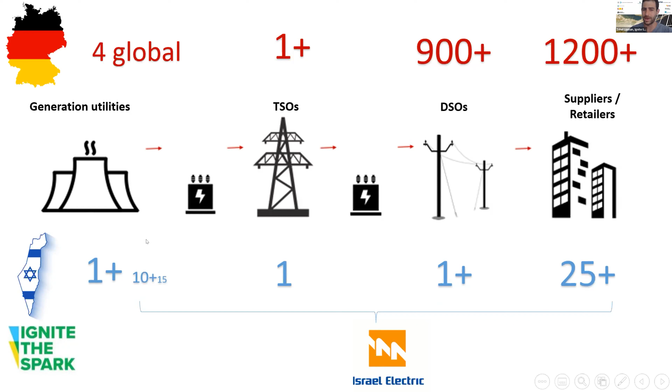Now try to compare that to Israel. Yes, both by size and population we are smaller than Germany, but we have a huge vertical utility called Israel Electric Company, which is both the biggest energy manufacturer, the only TSO, the only DSO, and the biggest supplier. Now, luckily, there was a big reform happening in Israel that unbundled the local energy market, but still, I think the structure of a very vertical governmental-owned company that owns most of the electricity market here in Israel has caused us some isolation.

Not isolation from COVID as we know it, but isolation related to the fact that we are not trading energy with any other neighboring country, except for a tiny line of 20 megawatts between Jericho and Jordan.

We found a lot of natural gas over the last decade, which allowed us to portray natural gas as a greener energy and put most of the focus there. Yes, I know most of Europe is jealous of Israel for the relatively comfortable energy prices we have, thanks to the fact that we have some domestic gas, but still, it allowed us to move most of our investments away from new energy-related technologies.

I think also the fact that there is no apparent win story or huge success story of a renewable energy tech company - and we can talk about the SolarEdge story afterwards - all of that has caused Israel to be, in a way, a few steps behind the rest of the world when it comes to energy technologies.

Now, after saying some maybe not the most appealing description of what's happening here in Israel, I'm happy to open this webinar and tell you that everything is changing now. And mostly the speakers that come after me will prove that.

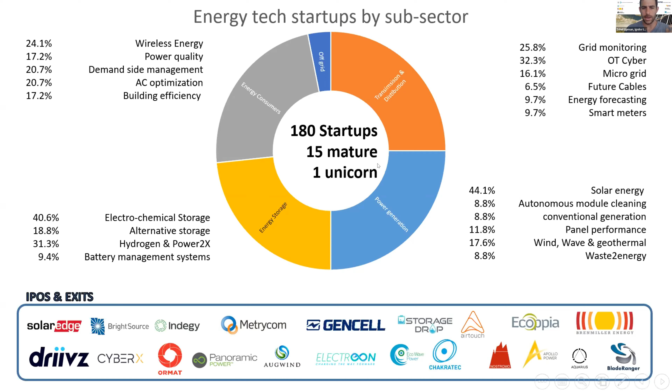Some opportunities for non-dilutive funding, including, and that will be most relevant for this call, some consortiums from the New Horizon programs and the EIC program, which I think is very relevant for everyone on this call, and several other stakeholders.

There are different cool technologies that are not on the map and right now in stealth mode, such as green hydrogen produced with quantum dots, a technique that basically skips electrolyzers, room temperature superconductors, a fusion company developing fusion in a box—a fusion system inside a container—drones that support the efficiency of wind turbines and solar plants, and many more.

A word about Ignite the Spark. We are trying to foster and help companies grow, but also create the new generation of energy entrepreneurs here in Israel. We'd be more than happy to find partners or similar ecosystems in Germany. So feel free to reach out if you can create smart connections and straightforward, non-monitored networking with other stakeholders. Exactly, this is our main goal.

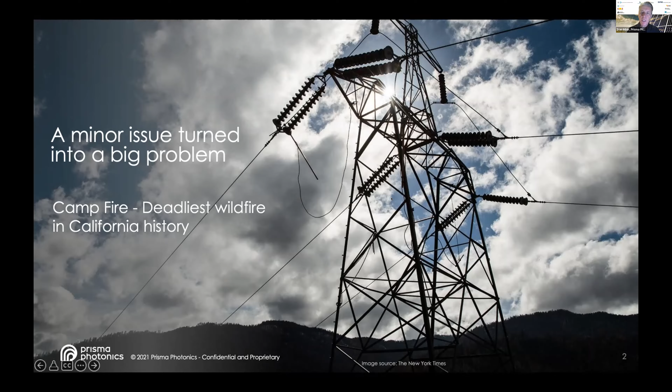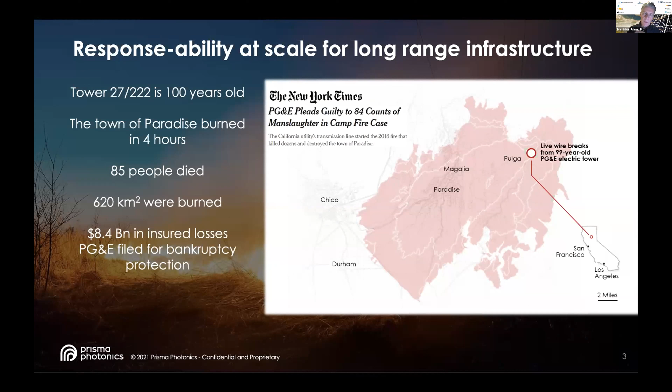If I take you back to November 2018, there was a single failure on this tower in the transmission line of California. This single failure initiated a wildfire, and eventually this single failure evolved to be the deadliest wildfire in California ever, with tens of people who died, tens of billions of dollars in damages, and eventually bankruptcy of the Californian utility. Everything started with a single failure in a critical infrastructure.

This is exactly what we are coming to help and solve. We're giving a solution that enables detecting in real time, with precise localization, any failure along a transmission line, and also detecting side effects like wildfire. But it can do much more than the two of those.

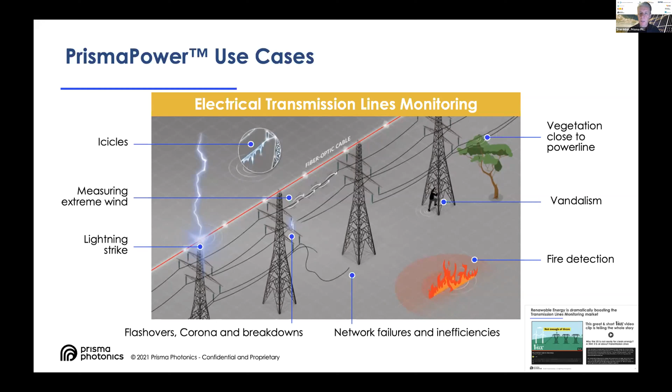It can give indication about, for example, extreme wind, lightning strike, icing, aspects of vandalism, of course failure, but also predictive maintenance - so before the problems evolve into a failure, we can give indication about the problem and its precise localization. This solution is relevant to almost any kind of long critical infrastructure, but in this talk we're focusing on electricity and the transmission line.

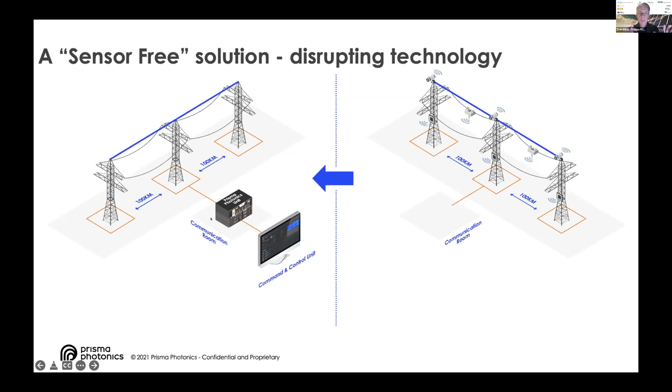What we're doing is basically using as a sensor the pre-existing optical fiber, a fiber optic cable that is already part of the transmission line, so there is no need to install any sensor at all. While we are plugging our system into this optical network, a single system can turn 100 kilometers of fiber into a high precision sensor. It's a very simple installation that's practically designed to scale big.

There is a lot of benefit. There is very fast deployment - plugging in a system and then immediately 100 kilometers turn into smart infrastructure. And since we don't need to install anything, the cost per kilometer is very attractive. And of course, we can detect a lot of aspects - it can be safety, security, maintenance, and even predictive maintenance.

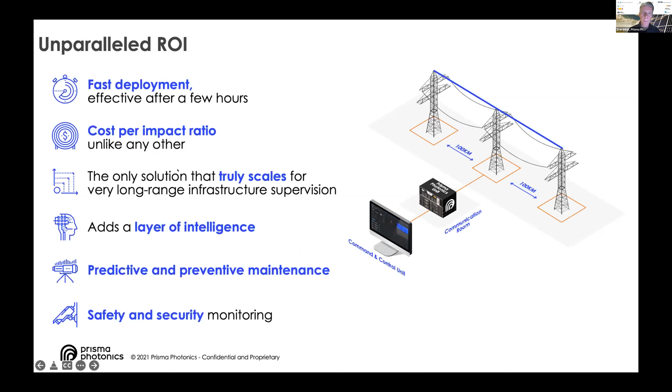I would mention that when we're speaking about thousands of kilometers and more, we're speaking about multiple systems connected into this fiber optics, but everything eventually is presented in a single, consolidated user interface. So the utility can see the whole picture of the whole network, whether it's 100 kilometers or 10,000 kilometers.

It's important to say that I mentioned overhead transmission lines, but this technology is also highly relevant to underground high voltage cable, and it can give failure localization. This is very important when you start to dig, mainly in urban environments, where digging is very complicated and expensive. So we can give a very precise localization within a resolution of a few meters.

We can do aspects of predictive maintenance, so before a problem evolves you can deal with it. And also third-party activities — if someone else is risking the electricity infrastructure by digging or walking close by, we can give an alert with precise localization and prevent a potential problem.

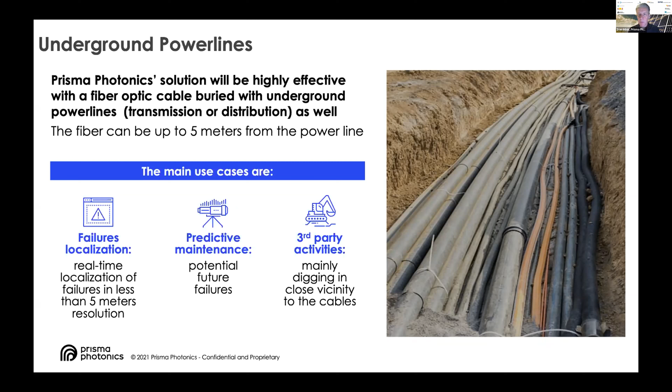Another interesting aspect is that two months ago we announced that we closed a 20 million investment round, and one of the investors, or participants, in this round was E.ON, the German power utility, probably the biggest utility in Europe. For us, having them participate in our finance round is a very significant vote of confidence from such a strategic player in this industry.

We're working on, or deploying, this technology globally, starting in Israel with a cooperation, and even recently participated in our investment round with the Israeli Electric Corporation. But also in North America with partners like the New York Power Authority, and also in Asia Pacific with partners like Tata.

The company started in 2017. We are 40 employees, and we're growing fast — we aim to double this headcount by the end of the year. I think that the main asset of the company is the team. We have a very strong technical team, real deep tech, from laser physics to machine learning and algorithms, but also strong management with vast experience taking startups from incorporation into global leadership.

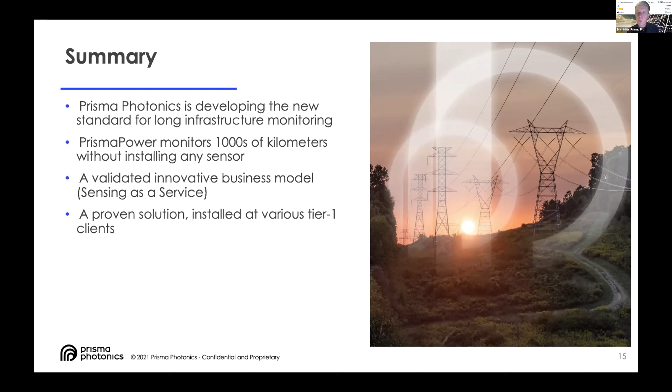Thank you very much, and we will be glad to answer questions either in this session or to follow up with anyone who's interested later on. Thank you.

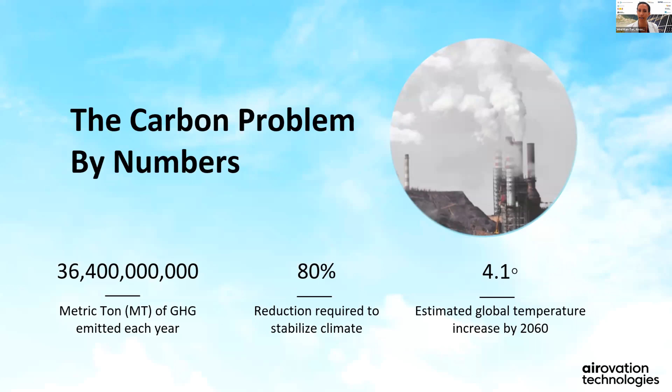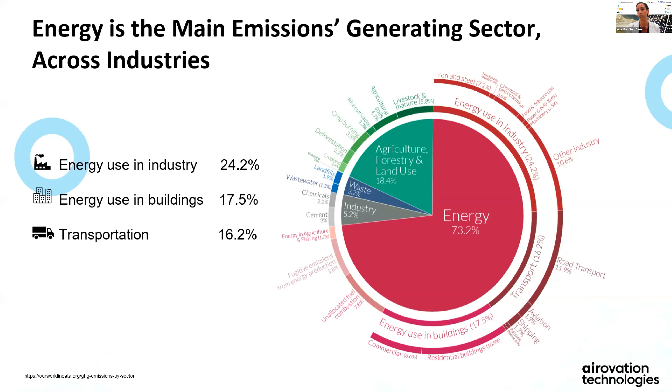And the way we do it is by capturing carbon and mineralizing it. The bigger problem, if we look at numbers, is that every year over 36.4 billion metric tons of greenhouse gases are emitted into the atmosphere. Out of that, 65% is carbon dioxide. Now, if we drill down into the most polluting sectors, we see that the energy sector has the greatest emissions, specifically energy used in industry.

So after 10 years of research by the Hebrew University in Jerusalem, a group of chemists led by Professor Yoel Sasson managed to stabilize the superoxide radical, which is the strongest oxidizer known to man in nature, inside a liquid phase.

So what it actually does is convert the carbon dioxide that is being captured into minerals, and those minerals are used as raw materials in many industries. This is how we create the circular economy, by providing those raw materials to the food and feed industry, pharmaceutical, fertilizers, and also glass industries.

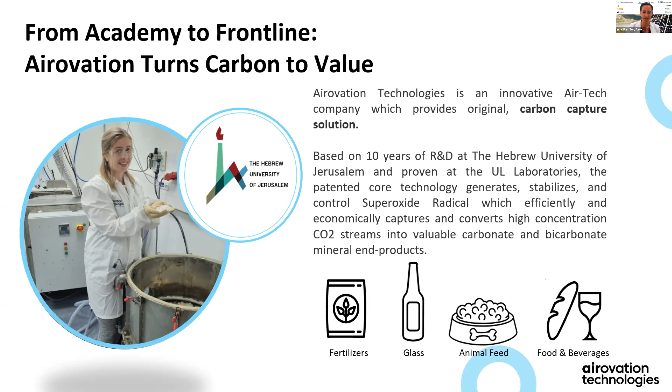And this technology is already patented — we have 2 patents, and a very vast know-how which is even more advanced than the patents currently registered. And a bit about the journey we've passed so far: we talked about the 10 years of research at the Hebrew University.

In 2017, we received the exclusive license. And since then, we launched another patent. In 2018, we had our first

lab demonstration in the Underwriters Laboratories in the US. In 2019, we had our first field technology demonstration in collaboration with the Israeli Ministry of Environmental Protection.

And last year, we signed a collaboration agreement with the biggest manufacturer of raw materials for our chemical reaction. And that manufacturer also decided to become an investor of Airovation Technologies.

This year, we are working on our first phase 1 here in Israel, scale up, and we are in the process of signing multiple international MOUs in Europe, Italy and UK specifically, and in Korea.

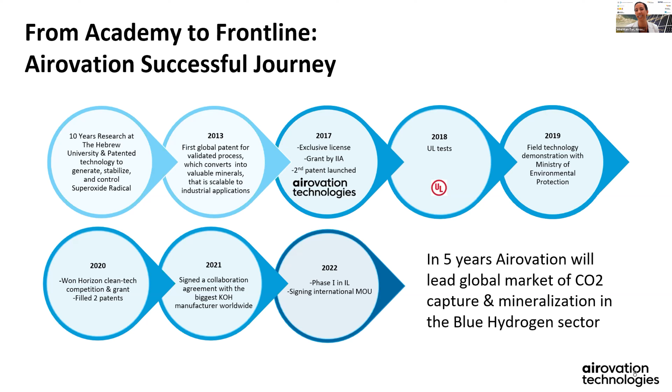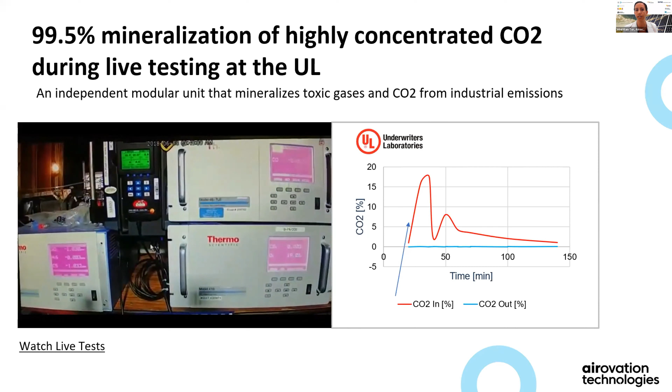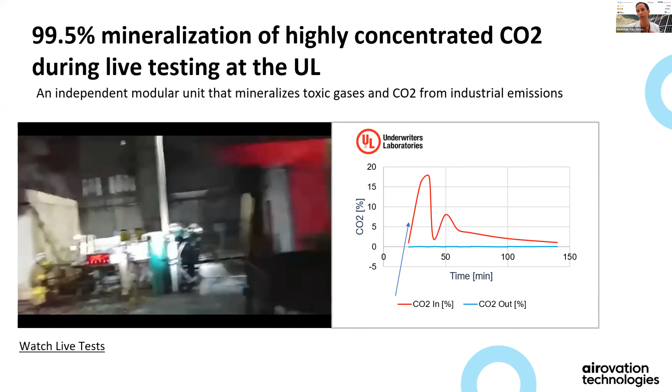And what you can see here is that from everything that entered into the reactor, only less than 1 ppm came out. So if we look at the right side of your screen on the graph, the red graph describes the concentration of CO2 that entered into the reactor during that live test. You can see that at the peak, the concentration was around 17 to 18% of CO2, while the blue graph below describes the concentration of CO2 that came out of the reactor.

So we actually saw mineralization of 99.5% of highly concentrated CO2 during that live test.

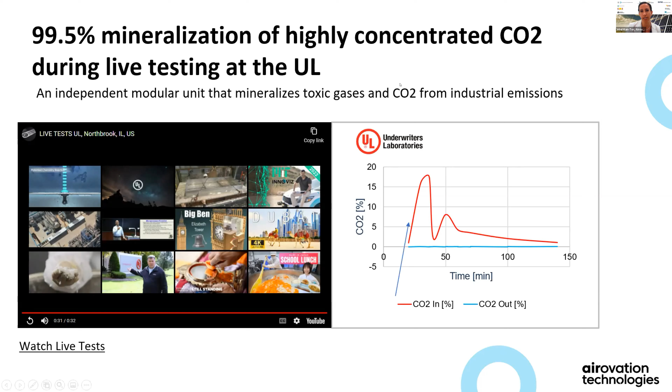So where we are currently at, the technology level is TRL6, meaning we had the technology demonstration in the certification lab and also the field demonstration.

This year, we are planning to start the scale up of capturing 150 metric tons of CO2 per year. That would be the reactor capacity.

And then next year, we will commence phase 2, which is already building the full modular unit, built into 40-foot containers. The capacity will be to capture 5,000 metric tons of concentrated CO2 per year.

The idea behind the containers is that, first of all, they are easily mobilized around the world, but also you can stack them up to 4 containers on top of each other.

So there's much thinking going into retrofitting, because we are aware that many factories will have to retrofit, and we are being very conscious of the footprint. Also, because of the high kinetics of the reaction, we are able to compress everything into one container.

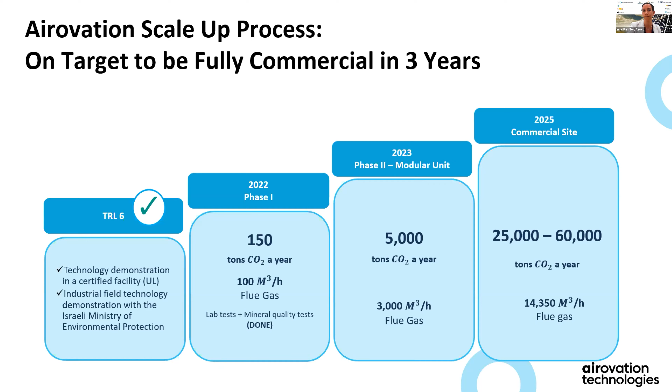And just to summarize the key competitive advantages that our technology has: first of all, very high grade, valuable minerals, as I mentioned, that can be used in the food and feed industry, pharmaceutical, as well as other less demanding industries. Also, our conversion rate is over 95%.

We capture the carbon directly from point of source, and this is why we can use this reaction with highly concentrated CO2.

The high grade minerals enable the circular economy. Also, the power requirement is very low compared to other technologies currently being developed. And this solution requires no pressurizing, no sequestration, storage, or transportation, which in many countries, and especially Europe, sequestration is not an option, as it can be too dangerous.

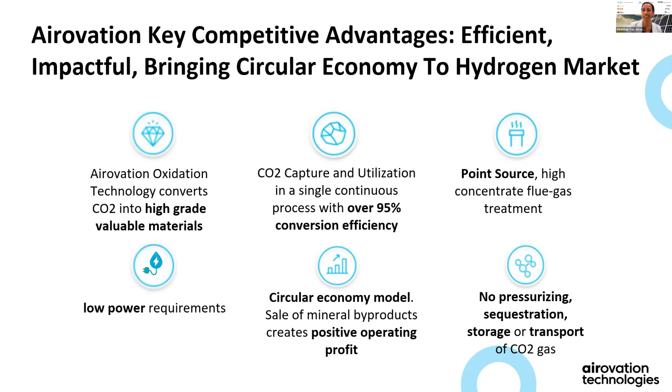And so this is a profitable solution. Our partners are UNIT, which is a daughter company of OCI, Dreamstone Partners, the Yosva Group, and Agar Corporation, which is a Canadian company that manufactures measurement equipment for the oil and gas industries.

We are currently looking for partners from the EPC sector and manufacturers of gray hydrogen that are interested in converting the gray hydrogen into blue hydrogen.

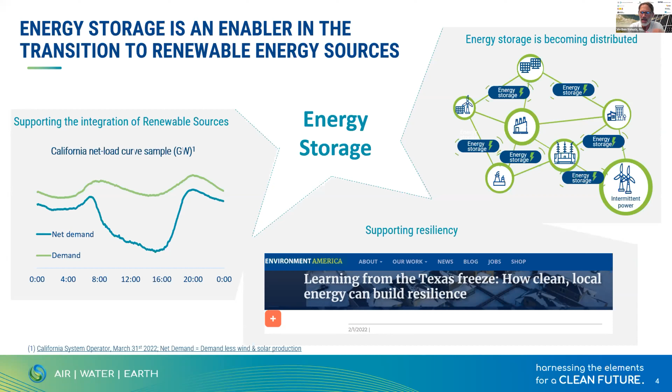So generally, the need for energy storage also comes from the change of grid architecture, as the grid is shifting from centralized architecture, where we have one big generation facility of fossil fuel, coal or oil, and usually one big energy storage asset, which is pumped hydro storage, huge facilities. Around that we have the network of transmission and distribution all the way to consumers. When we shift into renewable energy, we're actually shifting from centralized architecture into distributed architecture. This means we're going to require multiple energy storage assets in different areas and locations across the grid.

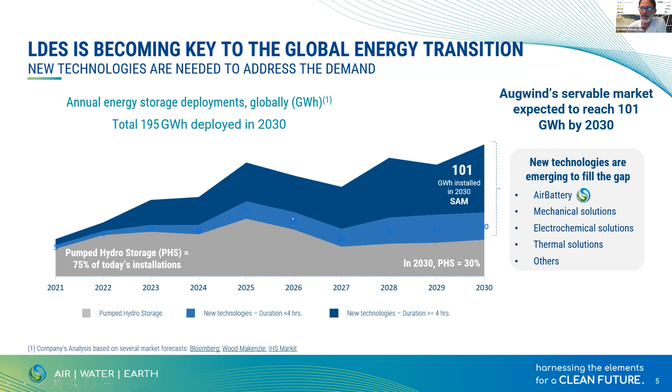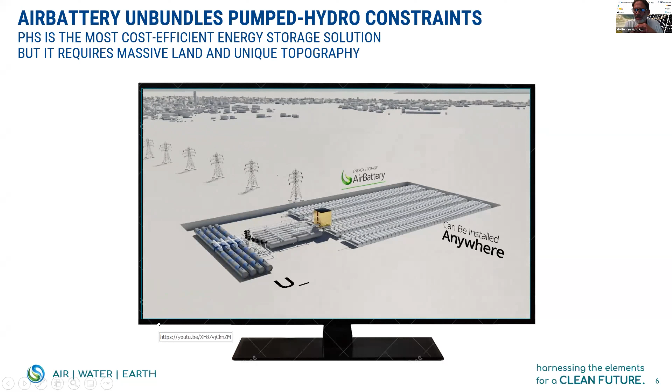So the nice thing about what Augwind did is that Augwind was successful in taking pumped hydro technology, which requires massive land, specific topographies, huge water reservoirs, and huge capex in terms of project management and establishment, and encapsulated it into a small modular system that uses the same principle of pumped hydro - only we call it pumped hydro in a box, or underground pumped hydro.

And this is basically the air battery. We took the major advantages of a pumped hydro system and enabled it to fit the needs of distributed energy resources.

How it works: there is a water reservoir, a closed circle of water running in the system. We have pumps, 4 in this case, 2 compression tanks, and storage tanks. This is a very simple mechanism.

When we want to store electricity, we use it to pump water from the reservoir into the compression tanks. They compress the air as the level rises, and the air is moved for storage. Once energy is on demand, we release the compressed air back through the water tanks, and we stream the water through a turbine that regenerates electricity.

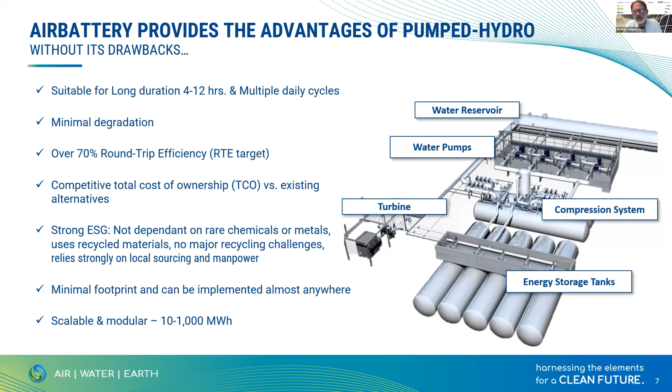So these are the same principles as pumped hydro, only instead of 400 meters of height difference between water reservoirs, we use 40 bars of air pressure to run the system in a closed circuit. This results in a very rigid and resilient system that enables multiple daily charge cycles with no degradation due to its technical nature, and also longer duration discharge depending on the quantity of storage tanks.

So I can say this is the AirBattery. The land above the system can be utilized for any function, with the charge mechanism using water, compressing air and moving it to as many storage tanks as we want. More storage tanks equals bigger capacity. Then there's the discharge element, which is basically a water turbine.

The fact that the system is decoupled between charge, discharge, and storage enables flexibility in addressing multiple applications, from industrial all the way through transmission distribution to standalone and utility scale energy storage.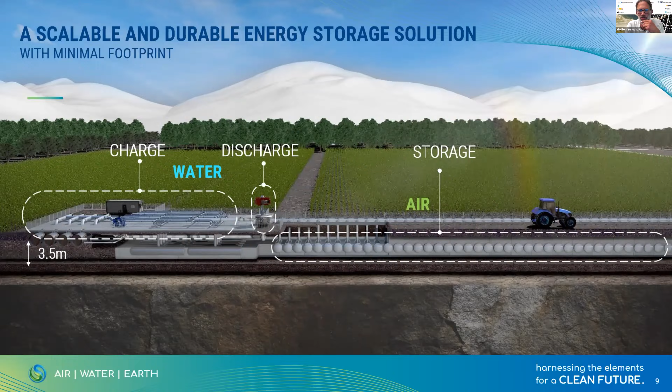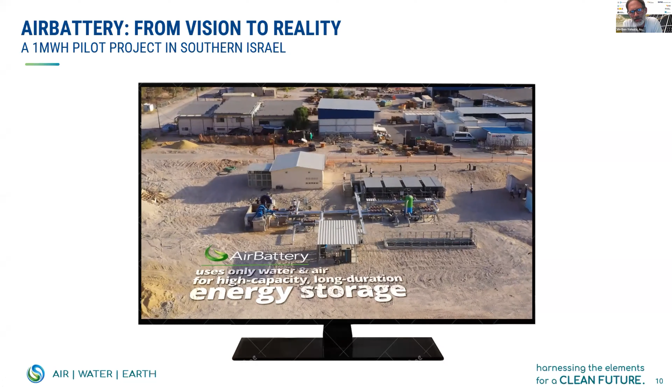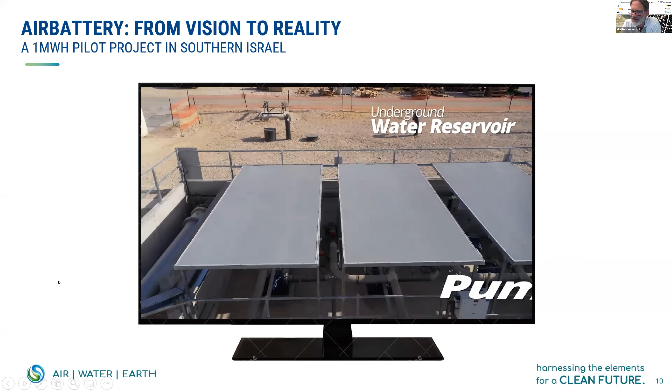I want to show a glimpse of our first commercial, or first demo scale installation, which we did here in southern Israel, accomplished earlier this year. This is a 1 megawatt-hour system buried underground in a kibbutz in the Arava part of southern Israel. There's a short capture here of how the system works.

Maybe we'll stay with that a little bit - it's going to make the logic of the system very clear. We see the tanks that are buried underground.

Once we want to charge energy, the pumps pump water from this big reservoir to the underground compression tanks. The air is compressed and then moved for storage. Again, another cycle - as much as we want to charge, the compressed air is moved to be stored in one of those 5 storage tanks. Each tank is 250 kilowatts.

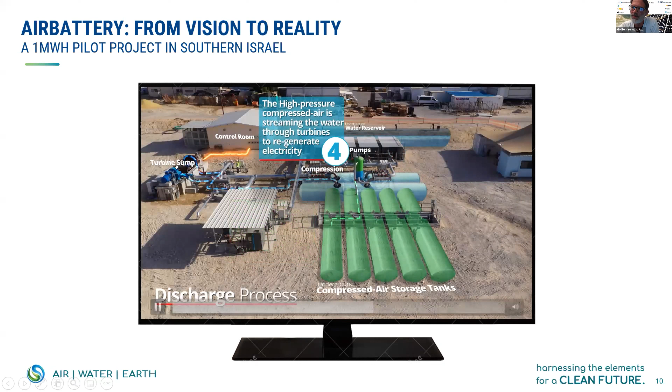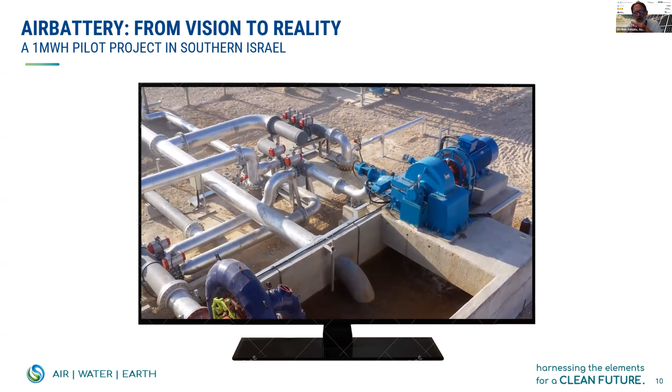Now, when energy is in demand, we release the compressed air, and it streams the water at high pressure through a turbine that regenerates electricity. So this is basically a very simple capture of the system's operation, and this is an actual system operating and working now under R&D tests, et cetera, in southern Israel.

Where we are right now is in the process of scaling up - we've just concluded phase 2 of our technology roadmap. Later this year, we're going to break ground with a bigger system already with a commercial customer in Israel. The plans are for next year to break ground with the Israeli electricity company on a 40 megawatt-hour installation for the Israeli electricity company.

So this is a glimpse of Augwind's air battery technology, and we're very happy for the opportunity, and we look forward to deploying our technology and implementing it in Europe and Germany specifically. We seek to partner with partners with strategic fit to our efforts, and we'll be happy to address any questions or additional information you might require.

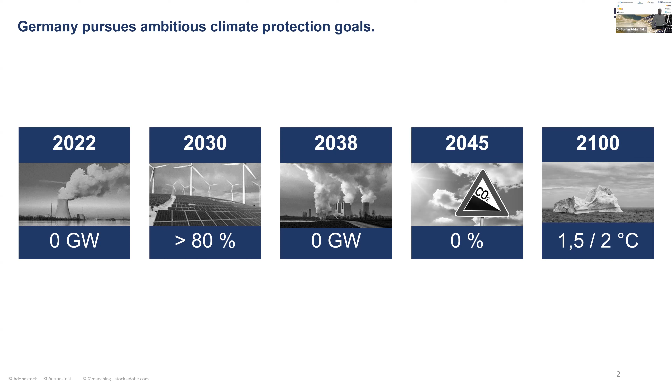But all these developments have an impact on our power supply system, as you can imagine. And in Germany, we have, as Ashel at the beginning already told you, 4 transmission grid operators. One of them, Sebastian, is with us today. Great to have you here today. And in our area, it's not 50 Hertz, it's Amprion who's responsible for the maximum voltage level.

And under this grid line, we have the so-called distribution grids. And all across Germany, we have 872 distribution grid operators. So it's a very fragmented structure. On the highest level, the transmission grid operator is responsible for the grid control and the system control.

That means he's responsible for the stability of the grid using so-called centralized power plants. Nuclear power plants, I already told you, will be shut down at the end of this year. Coal-fired power plants will be shut down in 2038 at the latest. And they have some assets, offshore wind turbines, but they are losing their assets.

In the meantime, at the regional level - I've got a problem here. Okay. In the meantime, there's a decentralized electricity supply system which consists of small PV plants, wind turbines, electrical vehicles, biomass, batteries, demand-side management from flexible production companies, high demand for green hydrogen, as well as small water power plants.

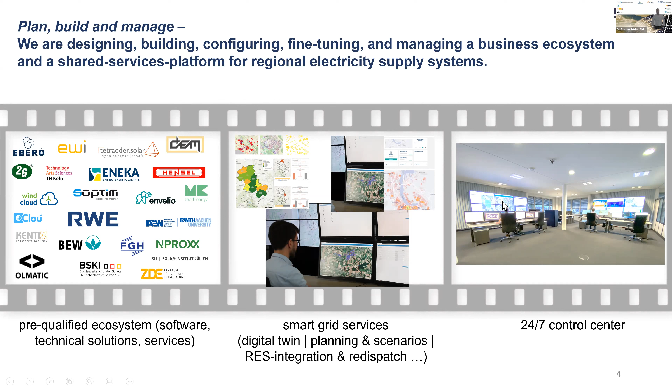We're not only integrating wind turbines and PV installations - we are also integrating batteries, large-scale storage systems, and there's a big demand in Germany for long-term storage systems. That's why we're interested in Airovation Technologies.

I'm very, very happy to have the opportunity to get in touch with you from Israel, because Israel might be an interesting partner for us, not only regarding all this energy tech, but also cybersecurity. That's why we're looking for strong partnerships in Israel as well. We're presenting all this technology, all the demands, all the challenges, even to politicians, such as our German chancellor, not only from Germany but also to the EU, to create a network and make clear what is needed, how it works, and who's paying for it.

Thanks for your attention, and I'm happy to be with you here.

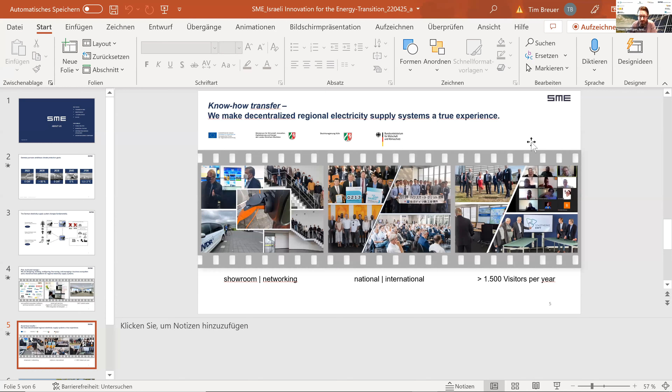Thanks a lot, thanks everyone, thanks Simon, thank the entire team for having me here. I'm really stoked to be with you guys. As Simon already mentioned, I'm here presenting the Elia Group and a bit of the Elia Group's approach on the energy transition, which is very clearly the big word throughout the whole conference here.

For everyone who doesn't know yet, Elia Group is active in electricity transmission. Elia Group is one of the TSOs, one of the top TSOs in Europe, so to say. We are located within the entirety of Belgium, so we manage the entire grid in Belgium. And you can also find us in the northeastern part of Germany, where we manage the grid as well.

As was already introduced by Stefan a bit, our role is threefold. Our role is managing the infrastructure - these are the big overhead lines you see in the pylons along the highways. We are balancing the electricity system, and finally we're also trying to facilitate the market as well.

More concretely, what do we try to do? We try to connect the generation with the distribution. This means we try to connect the generation of electricity to distribution, to households, to industrial clients. And there are a few challenges, which was already mentioned by some of the very interesting panelists, coming up inside our grid.

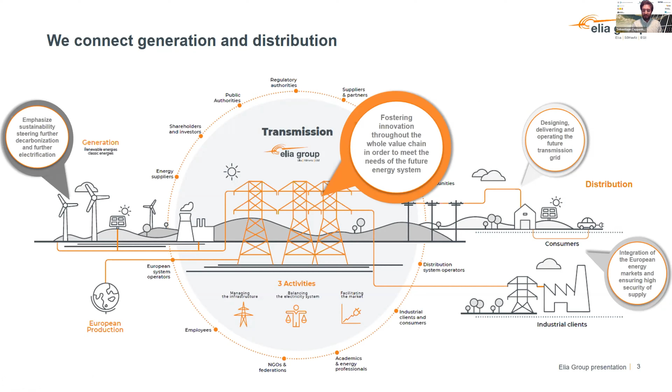This fostering of innovation is done throughout the whole company, but there's one section, the innovation department, of which I'm part, that is trying to steer this throughout the whole company. We embarked on a new journey, and we say it's a journey towards the moon.

What does this mean? We have set out 5 moonshots: system operations, infrastructure, asset management, offshore, and consumer centricity. These moonshots tackle the big challenges that we have right now in the energy ecosystem and also as a TSO.

What's different than the things we do day to day is these moonshots have the aim to evoke breakthrough changes that will solve the biggest challenges we have right now in the field, and they go way beyond business as usual. We're supported by internal expertise, but we also really need this surrounding ecosystem, and this is also why we're present here today.

If we look at the middle section, I highlighted just one because of time limitations. I can't deliver every one of them, but feel free to look at our integrated reporting. I'll put the link there, which will be shared at the end of the conference, where you can look into all of these great moonshot challenges.

If you look at, for instance, the asset management challenge, the goal they have set is by 2023, within 10 minutes, we can get to the cause of an overhead line incident. Therefore, we look into the feasibility of using drones, offshore robots, sensors, and digital models.

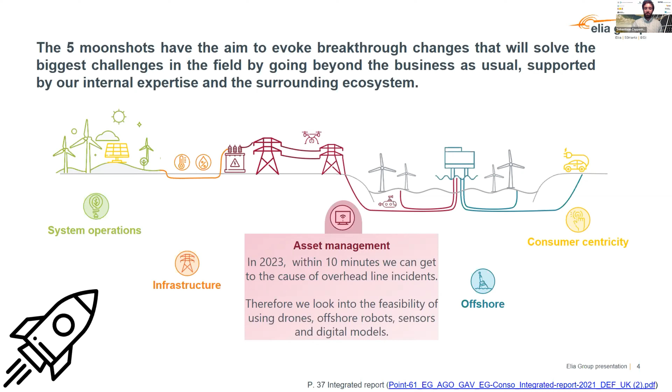Lastly, a slide to give a little bit more of what we all do within the innovation department is we try to tackle different sections. We have asset management, which takes onshore and offshore operations into account. We have consumer centricity that we focus on. We have an open innovation approach, and then we have system operations.

To dive a little deeper, the asset management is about how we can do maintenance and controlling of our different assets in a safe and easy way. What are we trying to do? We're looking into drone inspections, robots, the analysis of LiDAR scans, and using AI to try to see if we can do predictive maintenance.

Then in the second section, the consumer centricity, what are we doing here? This is mostly involved with the challenge that more and more decentralized energy resources will enter our grids. Our grid is becoming less of a top-down player and more bottom-up, with the consumer also participating. Here we look into different technologies that may facilitate this and can help the consumer steer.

Then we have system operations, which is of course our main task. What are we doing there? We're really trying to get a better grasp on how to steer this very complex electricity grid we're now going into. You see digital operator because we need more digital data, and also quantum computing because we need to look into the future and see how we can handle this huge mass of data we're going to have.

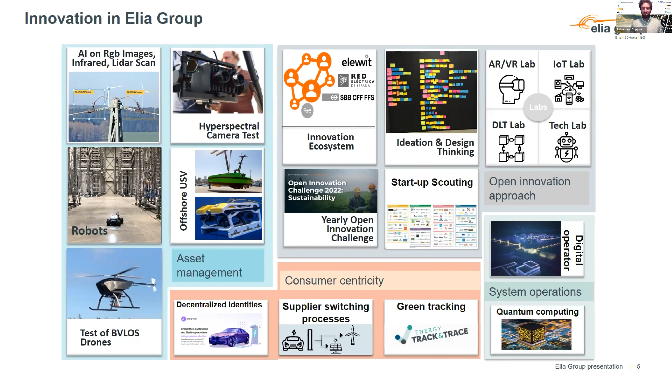Since what is most relevant is how we actually get to do things and how things will happen on the ground, I would like to ask you to give an example. Maybe Stefan, you can begin with an example of successful implementation of external innovation in one of the projects you managed - how the process was, what your role in this process was, because you said there are so many stakeholders in this area, which makes it problematic to really speed up the change. Maybe you can give one practical example from one of your projects.

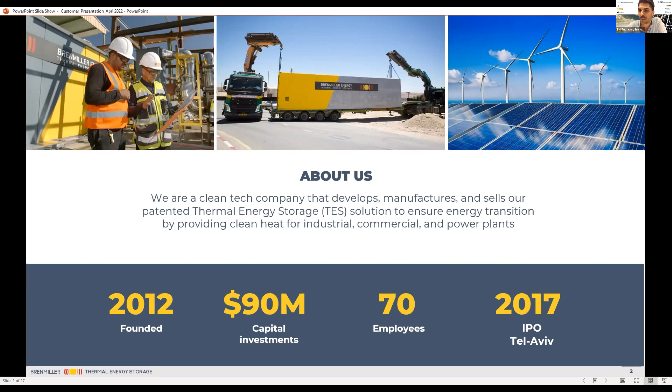The Israeli company Solel was acquired by Siemens in 2009, and Avi was appointed head of CSP operations at Siemens. After retiring from Siemens in 2012, Avi and the rest of the team started Brenmiller Energy, which focuses on developing, manufacturing and selling thermal energy storage solutions. We have raised over $90 million up till today. We are 70 employees here in Israel, and we've been a public company since 2017.

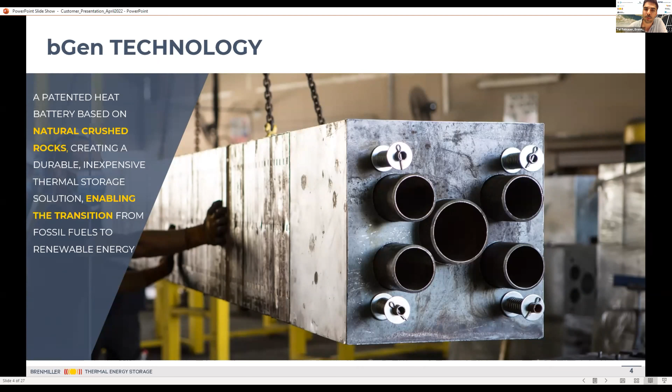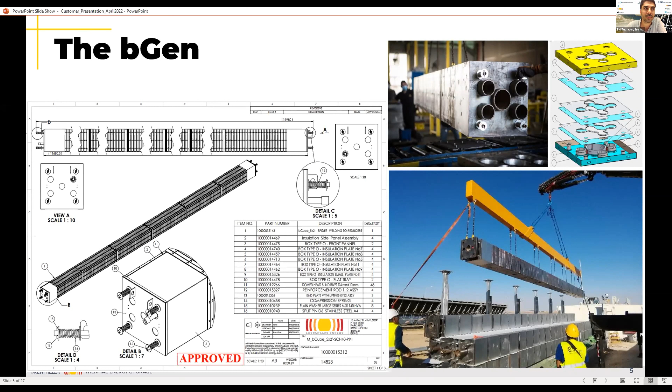Which assemble these modules. We stack about 300 of these cells into one module, and you can see the pipings which carry the energy in and out of the modules. These modules are prefabricated in our manufacturing plant in Israel, in Dimona, and then shipped and assembled on site, on the project site, according to the size, the capacity, and the power which is needed for the project.

Our unit is actually a combination of thermal energy storage combined with a heat exchanger and steam generation, all into one unit. Very green and clean solution. There's no chemicals or salts, no hazardous materials, nothing that could explode. Very modular.

As you saw before, we can start relatively small with 2, 3, 4 megawatt hour and go up to hundreds of megawatts by assembling more and more modules. There's no degradation of the materials, no cycling effect to the solution, so we can provide a very long lifetime of over 30 years. And this is essentially built out of rocks, metals, and pipings, relatively low-cost materials, which allows us to bring quite a competitive solution to the table.

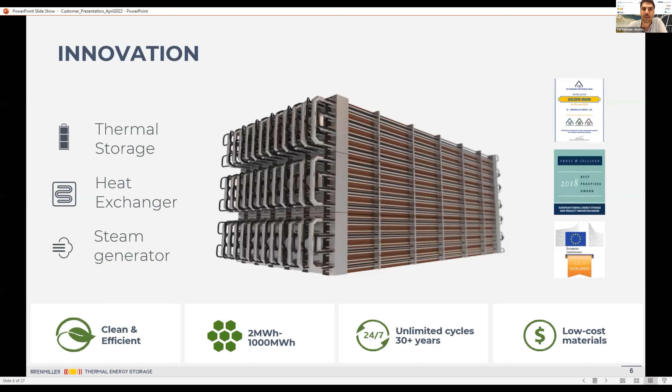The way that it works is we can charge our energy storage unit either electrically, coming from renewables, PV, wind, or from off-peak electricity. Inside the modules, we have embedded electrical heaters which convert the electricity into heat at very high efficiency, over 99% efficiency in this process, since the electrical heaters are embedded inside. So this is one way of charging.

A different way is charging thermally. We can use different sources of thermal inputs like biomass, biogas, CSP, steam, waste heat, almost any type of high-grade heat source we can utilize to charge the storage.

When charging thermally, we circulate this heat inside the storage modules. The heat is transferred into the storage media. Then on the discharging cycle, we have water, which is introduced into the system, circulated inside and boils, and comes out as steam. We can control the conditions of the steam, the temperature and the pressure, and provide from low-grade industrial condition steam, let's say 200 degrees or so, and go up to superheated steam, 500 degrees, 100 bar, to drive a steam turbine and generate power.

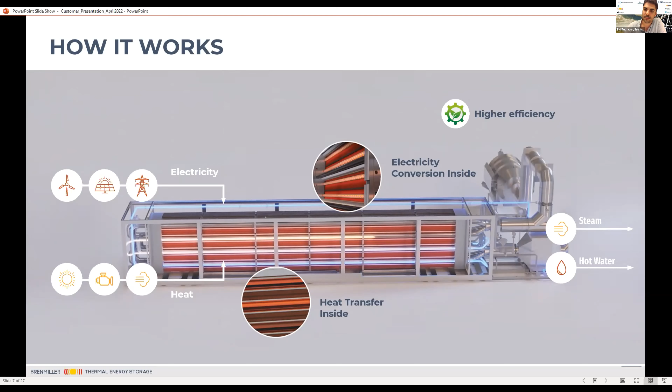So with these different inputs and outputs, we can deliver several applications for our technology. We are targeting today 2 different markets. One is the industrial market, industries which consume a lot of thermal energy, mostly in the food sector, chemicals, plastic, paper, these types of industries. And our second market is thermal power plants, both gas and coal power plants, which I will explain in a minute.

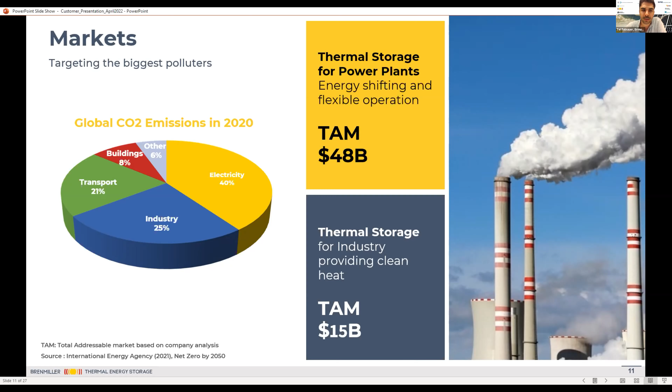So in the industrial sector, it is very heavily based today on fossil fuels for their heat generation. As you can see, about 74% of the industrial energy consumption is actually in the form of heat and not electricity. And over 90% of this heat is generated from fossil fuels.

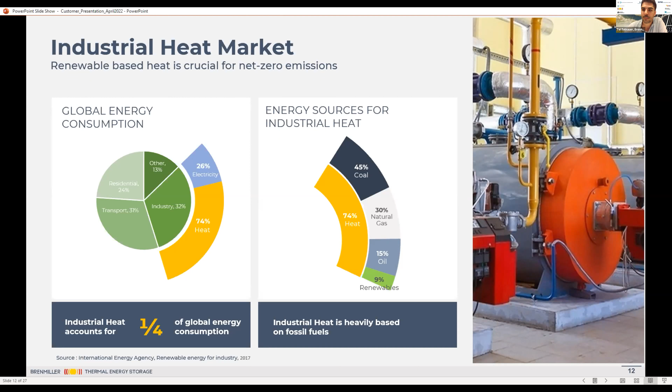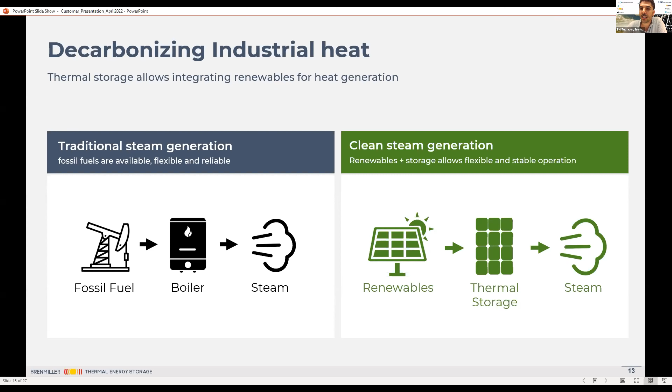This is the main challenge here of decarbonizing this heat and introducing more renewable sources for this industry. So this is one of our targets. Instead of the traditional way of generating heat, mostly steam based on fossil fuel burned on demand, we couple our storage solution together with renewable sources, which is a very intermittent source. When coupling with thermal storage, it becomes much more stable, much more reliable, and you can decouple your energy input from the consumed energy output.

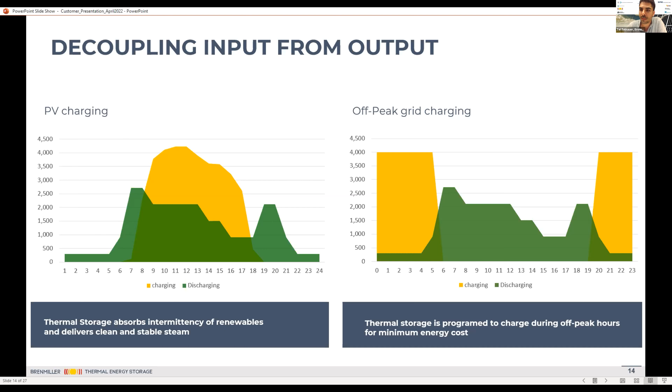So on the left, you can see an example of a unit which is being charged from a PV source. Input is during solar hours, and the output is on demand throughout the day, 24/7. On the right, you can see a different type of system which is charged during off-peak hours during the night, and then dispatches energy throughout the day, again according to demand. So decoupling inputs from outputs is one of the major advantages for storage.

A couple of projects to show. On the left, you can see a project which is a type of cogeneration unit. You can see here a gas turbine which is feeding a university campus in upstate New York. We are actually collecting the exhaust heat from this unit to heat up the storage unit, and then delivering hot water to the university campus. So decoupling electricity generation from heat consumption allows much higher efficiency for this cogeneration unit.

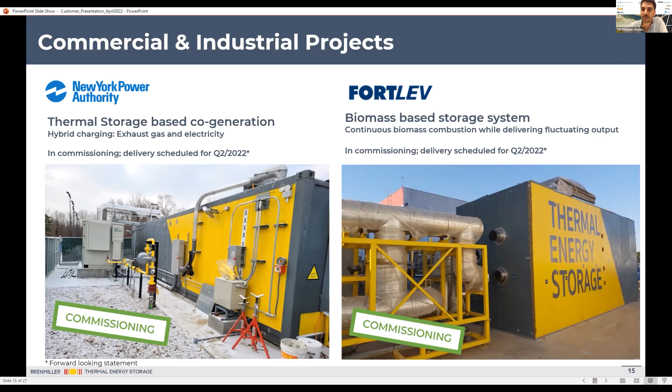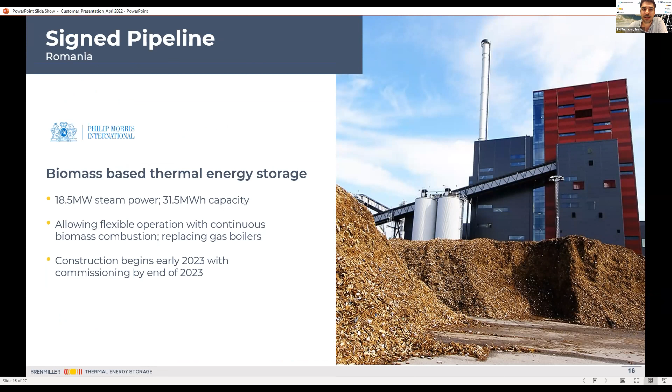I'll try to move ahead as I see I'm running out of time. I'll just mention this project: we've recently signed a project with Philip Morris, which is biomass-based in Romania. For power plants, we have two different offerings.

One is for gas power plants and one is for coal power plants. For coal, what we are aiming is to replace coal-fired boilers with our storage unit, and then we can transform old and retiring coal plants into grid storage facilities by utilizing the existing infrastructure on site. So utilizing the real estate, the turbines, the grid connection, and so on, and just replacing the boilers with our storage, which is fed from renewable sources. We think this is a good application for our technology.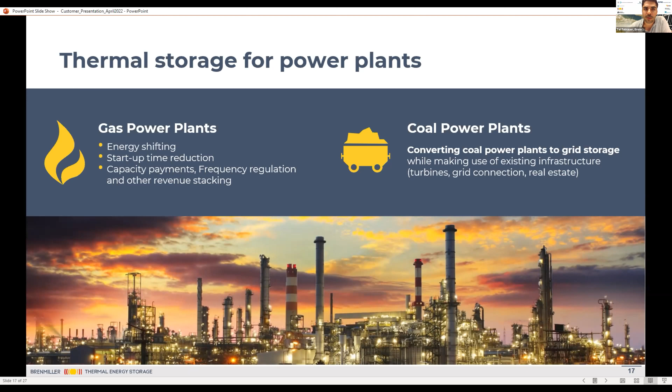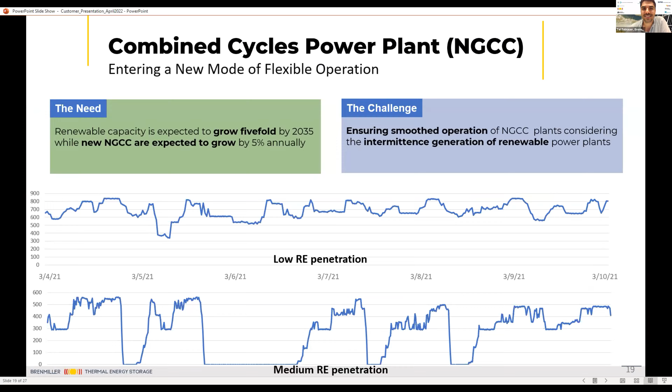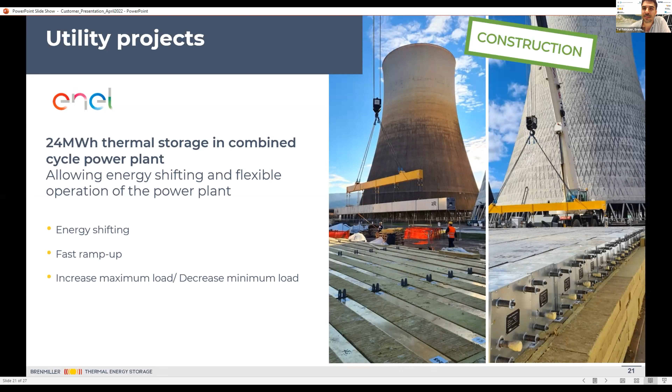Okay, so just to show my last slide here. This is a project we are doing with Enel in Italy, a 24 megawatt hour storage solution in a combined cycle power plant, allowing energy shifting, faster ramp up, and different services to this power plant. This is under construction these days.

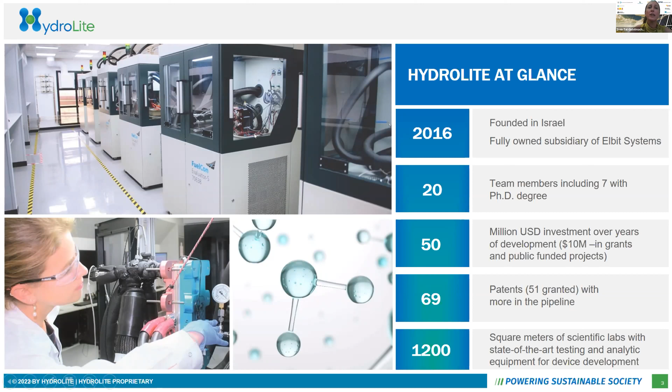51 of those are already granted worldwide, and we have more applications in the pipeline. This portfolio practically covers the whole alkaline exchange membrane technology domain, from the core materials for cells, stack, modules, and up to system level. We are located in Caesarea, spread through 1,200 square meters of facilities, equipped with scientific laboratories, state-of-the-art equipment that allows us to make full development and evaluation of both fuel cell and electrolyzer devices.

So what is our technology? We did not invent the fuel cells. We did not invent the electrolyzers. These are practically devices that have been invented decades ago. What we did invent and where we've been pioneers is a disruptive approach of an alkaline membrane applicable. We first applied it for a fuel cell device, and recently, in the last couple of years, we also exploited it for electrolyzer development.

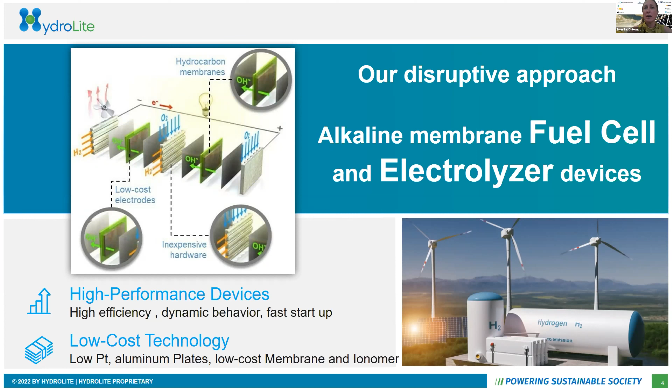So the benefits that this disruptive approach brings to the table is the combination of a high performance device in terms of the efficiency, dynamic behavior, intermittence, and the fast turn on and off, combined with low cost materials resulting from the alkaline environment, embedded in our low-cost electrodes with low-cost catalysts, embedded in our inexpensive hardware comprising low-cost materials such as aluminum with simple coatings, and of course the chemistry, the heart of the membrane being derived from a hydrocarbon polymeric family.

So we have two applications. The first one is our fuel cell device, which you see here in this picture. It's practically our 5 to 10 kilowatt stationary fuel cell power generator, operating at an efficiency ranging from 50 to 60%, depending on the operation point.

With this system, we are targeting stationary markets such as the residential sector, mobile towers. Practically, you can look at this fuel cell as a battery charger that can serve either for mobile platforms or stationary platforms.

We are involved in demonstrating this capability in an electric vehicle range extender. And since this is a modular system being capable of being scaled up to tens of kilowatts, up to 100 kilowatts building block, then with that, one can further address market segments for large power outages such as data centers, etc.

The benefits of this technology, as I said, result from the alkaline exchange membrane domain, depicted in low capex and opex. The system practically allows long backup times from several hours up to several days, with a lifetime ranging from 10 to 15 years. And it's a totally green system, quiet, without any toxic or problematic emissions, and 95% of the system is recyclable.

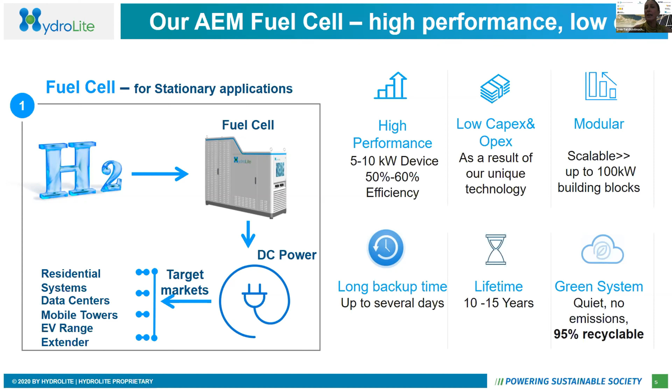The second application is the alkaline exchange membrane electrolyzer that we have developed for green hydrogen production. The electrolyzer is practically a mirror device of a fuel cell. If the fuel cell uses hydrogen and oxygen from the air to convert those into electricity with only water as a byproduct, the electrolyzer does exactly the opposite, uses the electricity coming from a renewable source and splitting with it water to hydrogen and oxygen.

We've been capable of demonstrating quite high performance in terms of the efficiency - 45 kilowatt hours for 1 kilogram of hydrogen production with our alkaline exchange membrane electrolyzer, at a quality of hydrogen gas of 99.999%, so rather pure. A very proprietary strong benefit of our technology is that we can use low water quality in terms of the water pureness.

So we can work with tap water, we can work with brine and brackish water, and this is totally unlike the competitor PEM technology, which practically requires deionized water. This strong benefit opens a lot of opportunities, especially when we look at the recent usage of electrolyzers for hydrogen production and energy storage in offshore platforms.

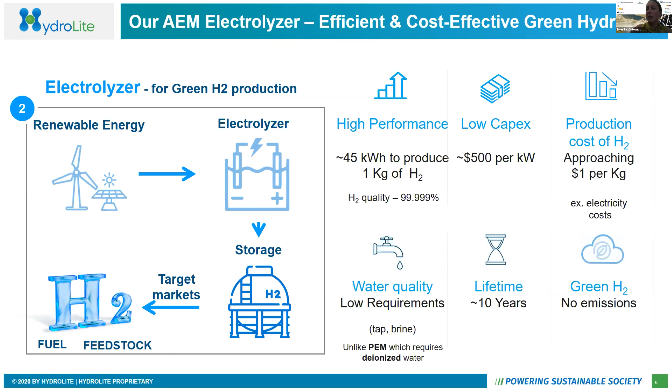That is practically very applicable, since we can practically split saline water as well with our patented technology. So when we look at the benefits of the AEM electrolyzer technology, it's a combination of high efficiency and low cost. The capex of such a product is approximately $500 per kilowatt, with a production cost of green hydrogen approaching the gray hydrogen cost. Even at gigawatt scale, approaching $1 per kilogram. That does not include the electricity cost. And of course, it's totally green without any CO2 emissions.

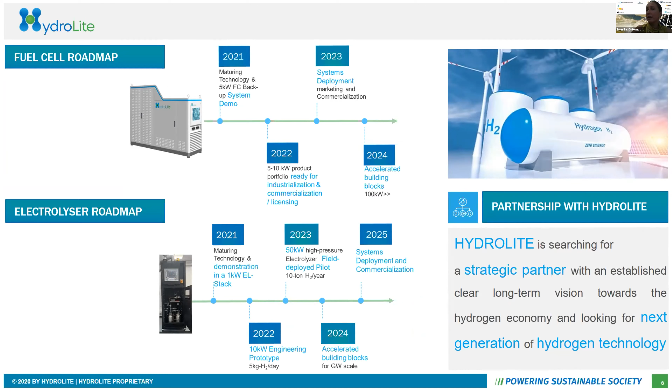We are currently searching, this is the roadmap, for strategic partners that will help us promote the roadmap, make joint projects for pilot establishing and demonstration, and mass manufacturing and further industrialization of these technologies. You can have more information on our website, and please, we are here if you have further questions.

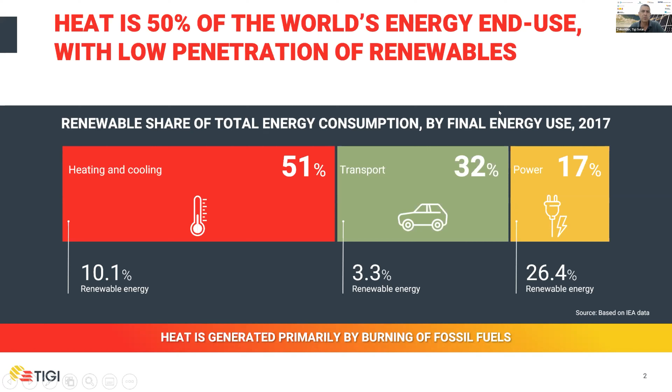This is what TIGI was built to solve. Initially, we developed a new type of solar thermal collector that generates heat. It is focused on solving the reason why solar thermal collectors don't work in cold climate conditions or at higher target temperatures. These collectors are normally not very well insulated, and they are not insulated primarily on the sun-facing side because you need to let the sun in. This is also the place where most of the losses occur.

TIGI has developed a transparent insulation solution that allows the sun in, but doesn't allow or minimizes losses of energy out.

And the result is that it works even when it's very cold outside, or if you need much higher target temperatures. TIGI is now focusing on up to 100 degrees Celsius, although the technology is capable of doing more. The need for higher target temperatures is not primarily in residential, it is primarily in industrial, agricultural, and commercial uses.

We have obtained certifications for Europe and the United States. This is protected by dozens of granted patents. It is much more complex than what I'm explaining right now. And the result of having a much, much better collector leads to a lower cost kilowatt hour, lower cost than any other alternative in most situations.

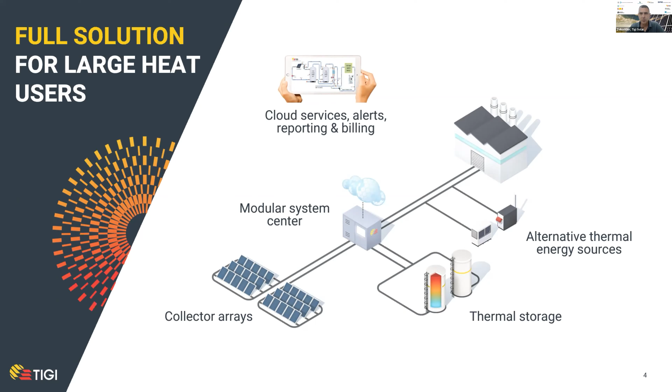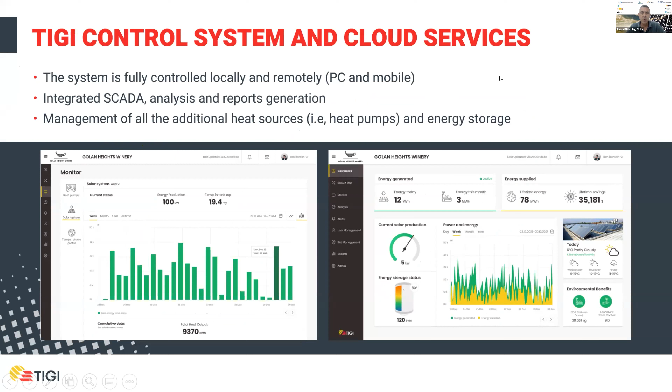And these systems are what we're currently supplying. Part of the services in the cloud, we also measure the energy that the system generates from remote and can optimize it, but can also work in a business model of actually selling the heat rather than selling the systems.

Most renewable heat systems are small, residential, and therefore everything that we know about financing in renewables, which we know from photovoltaic fields and from wind and from storage, is not currently playing a strong role in heat. Since the systems that we do, and you can see a few of them over here, are larger, they are supplied to larger organizations - again, hospitals or hotels or industry or agriculture. There is an opportunity to finance them, and then the customer can get lower cost energy from day one without investment, and it's good for the environment and good for regulation.

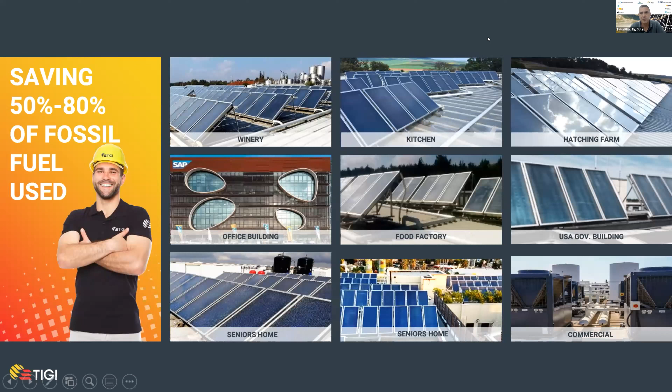Obviously, with prices of energy and the level of motivation right now in Europe for renewables post-Ukraine and everything else that we know, COP26, etc., the alternative cost of energy is very high, and there's a good opportunity to finance such solutions. This is just to give you an example of a system.

This is a winery, the third largest winery in Israel. We supply year-round water at 85 degrees Celsius for washing of wine barrels and other processes that they have, with return on investment of about 4 years for something that has a life of 25 years. And it doesn't emit anything - it's all based on the sun, saving 70% of all the fossil fuel that they used before we came.

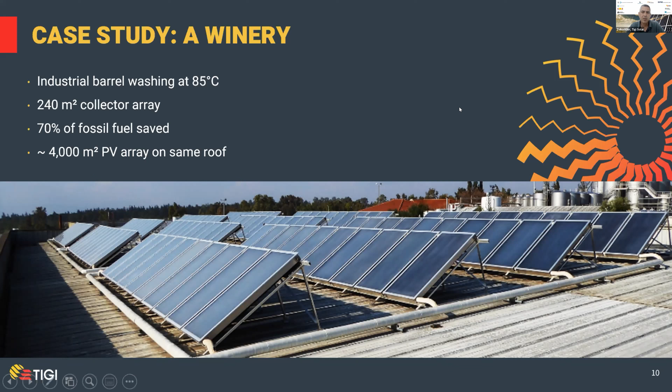I mentioned the business model - I think that would make a very big difference. We expect that people invest in things and they invest in renewables, but they don't usually want the capex in their books. The fact that we trust our equipment reduces the risk, and that we can finance it, I believe, will make it much easier to implement at large scale.

Our plan, since taking the company public in Israel about a year ago, is to come and become a bigger player in Europe. We have already put in place a couple of systems in Germany and in Norway and the UK, but we are restarting this effort with much more energy and the financing that's needed, looking for partners to put this in play for the right kind of customers. So thank you very much.